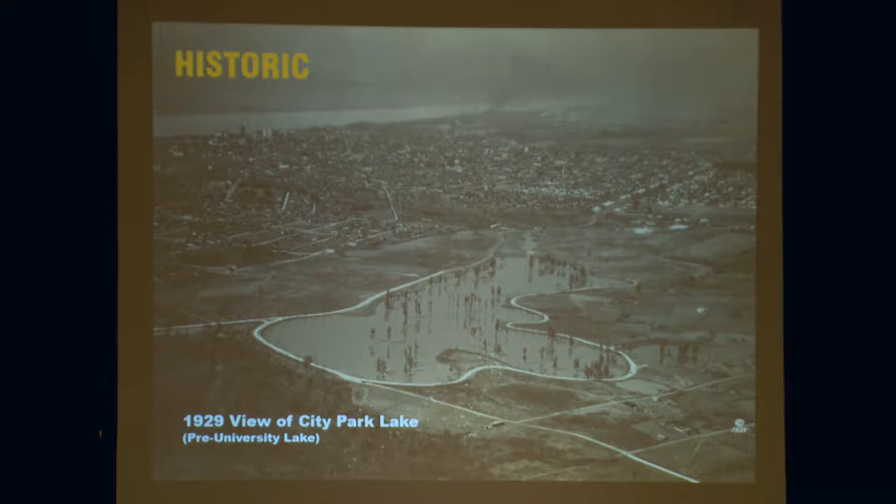Well, almost immediately afterwards, there were fish kills, there were algae blooms. Invasive species started to take over the lakes. They had to do things. All those beautiful cypress trees started to die. There was erosion from day one.

And the reason why is because these lakes were never really designed, right? Not in a robust way. It was just a dam, a make-work project, and then they kind of moved on, right? And they've been beautiful. They function very well when you consider the limited amount of thought that really went into designing them.

And I think that's the opportunity before us today: to think about design and how we actually design a place that really functions for all the things people want to do there. Running, right? That's a pretty simple thing. It's not hard to design for running around the lake. I just need a road and some paving. But it doesn't really work that well because people are running on a road and there's traffic and there's no crossings for them to get across. So a simple thing like that, a lot of design thinking could go into making it much better. That's really what we're trying to do with this project more than anything.

So there's a sort of tipping point here. If you look at Campus Lake, it's starting to fill in. You can see what used to be, when I was at LSU, a big lake, has already turned into half full of willow trees and other things that are starting to fill in. Behind the Acacia House, that's where I lived for a while - sadly it's gone, they kicked them off campus. But behind it, that area is starting to fill in little by little with reeds and all sorts of things, right?

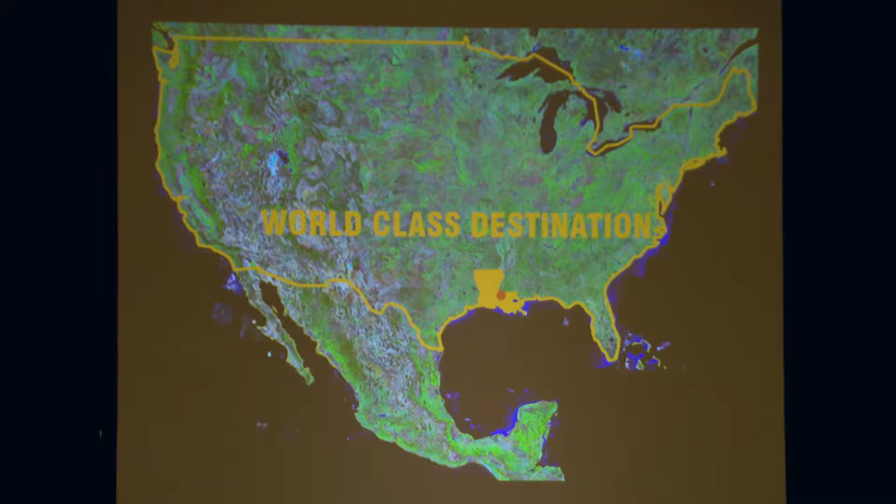People have said, well, world-class, gosh, I don't think I want that. Well, this is Baton Rouge, Louisiana. Why would you not want that? We're a capital, a great capital in the United States, and it's a place that people do travel to from around the world. We don't want to be overrun like Disney World, but when people do come here, they should go away saying, wow, that's a world-class place. I didn't realize it. I should go back sometime.

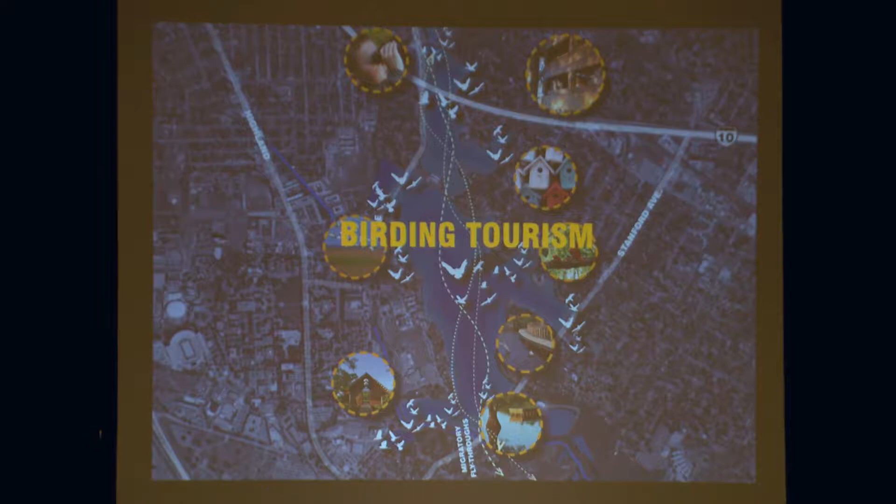Birding tourism is something that's clearly happening here. This is a kind of tourism that's very low impact. It's not throngs of people coming, and it's very seasonal. People come and look at birds, study them at certain times of the year. They stay in hotels, they eat in restaurants. All sorts of things spin off of having a place that people come and view birds.

Improving water quality is another big one, and lots of things happen when you improve the water quality. You can take your kid fishing and he might actually catch a fish every time he goes. That would be pretty cool. But other things too - university students, high school students can participate in going out and measuring the water to understand what's in it, what used to be in it, what's in it now, all these sort of things. And you can start to think about different ecologies that might take advantage of this improved water quality.

And then communities take advantage of it too. We want people who live here to go out and walk around the lakes and not always be thinking, oh, that water's so disgusting. We want them to walk around and think, this place is wonderful. I want to get on a canoe, I want to get on a paddleboard, and I'm not concerned about it anymore. I want to catch a fish and eat the fish that comes out of the lake. So all those things are great, but it's not just recreation of running and biking. If it's a place where you can come and just meet your neighbors, that's a pretty cool thing too. That creates a much more healthy community. People feel safe and secure when you do that.

So it's not all sunshine and roses - you can't just kind of go out. We don't want to do what has been done before. There are key challenges that we have to get into and try to understand how we're going to approach them.

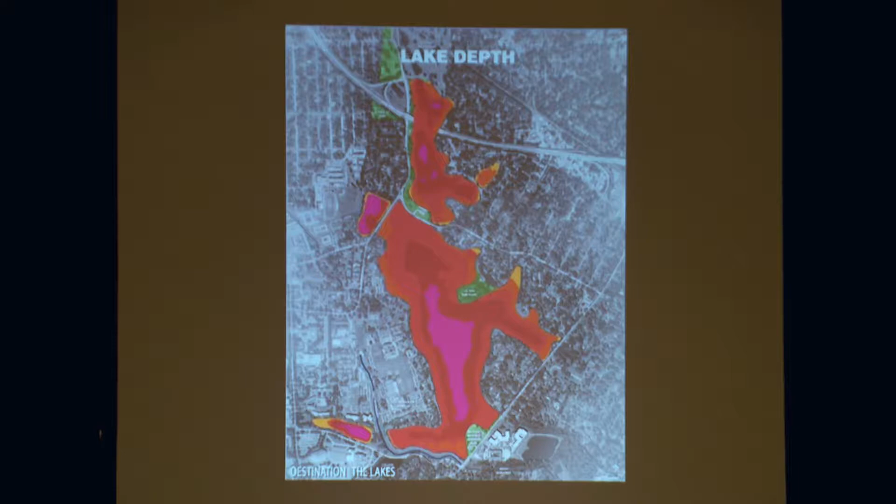The other big challenge we have is the depth of the water in the lakes. This is the number one issue that's now starting to create a tipping point within the lakes. They're very shallow, and shallow water gets hot. In South Louisiana, hot water creates algae blooms and all sorts of things start to happen. So a very simple thing we can do is just deepen the water. That's a huge step in the right direction because it takes care of a lot of different problems.

Now, underneath that water there's a lot of stumps. Is that an opportunity or a problem? Maybe a little bit of both. I like the idea that we can do things with the stumps - we can make kids' play areas out of them, or use them to create certain types of habitat. If you look out into the lakes now, wherever there's a log or something, turtles are on it. There's not enough of that. There could be a lot more of that kind of habitat within the lake. So if we think about using some of these structures to do that, that would be very beneficial.

It's owned by BREC, which is a city institution, of course. But it goes beyond that, just who owns it. It's implied ownership that is really, I think, the secret to this project.

There are areas that seem like they are very private, and that's against these residential areas. If we try to do things in those areas that don't respect that, it's going to be a failure, and nobody wants to go down that road.

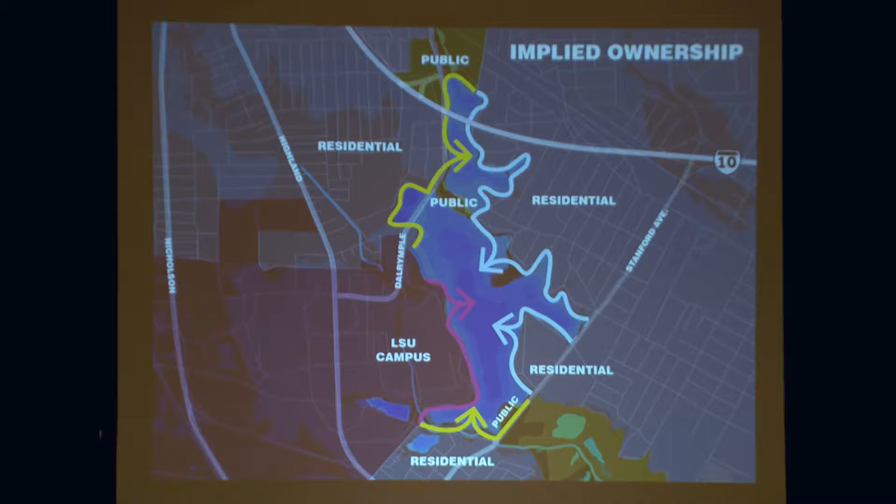Before we get into looking at the plan and all the components in it, we're going to look at the systems behind the plan. These are things that work across the whole plan, and you have to deal with them in a systematic way. If you just try to do them piecemeal, piece by piece, it doesn't really add up to a robust project.

It's generally homes and businesses and things—we're not talking about dirty industries within this watershed. So you're talking about things that just happen in your front yard. That's the kind of stuff that comes into the water. If you fertilize your lawn, that comes into the lakes. If you pour grease down a catch basin, that comes into the lakes. Those are the things we need to think about, and that's what we start to program out and understand where they enter, because that tells us what we have to do to clean the water.

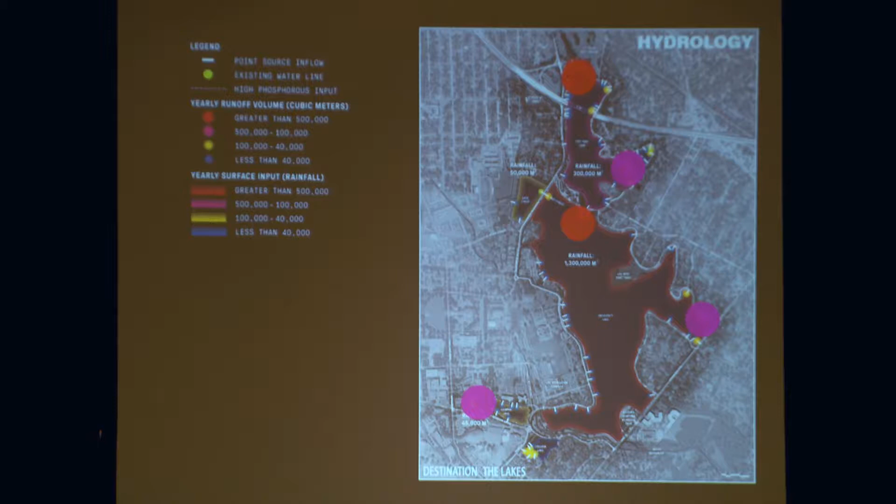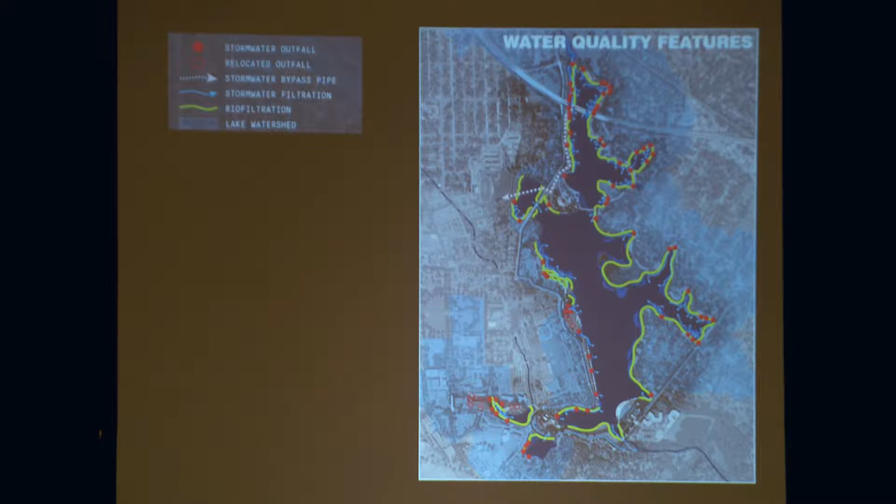That's really our number one job—take nutrients out so that algae and things like that don't continue to bloom. But there are other things where we're looking at other ways of dealing with some of the larger outfalls, and other places where we're looking at just how the water circulates and moves through the system. Right now there's a dam between the two lakes. We're looking at removing that, and we'll talk about that in more detail—that changes the hydrology also.

So these are the three things we're primarily dealing with when it comes to cleaning water. The first one, floatables, that's probably what everybody looks at, that's disgusting, right? I see all this dirty garbage and stuff. That's actually the easiest thing to fix. They float, you can scoop them out. When wind pushes them in one direction, if you have traps there to collect it, you can get rid of it. You need to think about upstream issues, but generally that's the easiest thing.

The second one are sediments. Wherever you had a catch basin or an inlet into the lake, if you could just build a little basin there and let the water sit and hang out for a little while, most of the sediment falls out. Every now and then you come out and scoop out the sediment. It takes time, it's a little more complicated, but not a huge thing.

The nutrients, that's the one that's the real problem. That's generally fertilizer, phosphorus, nitrogen, stuff like that, that just feeds this beast inside the lake, which is algae, and that sucks up all the oxygen. So those are the major things we're trying to work with.

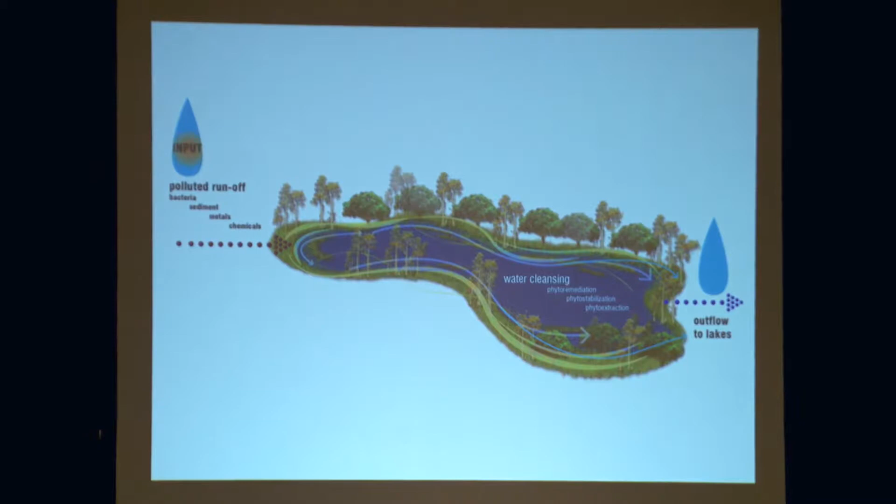So this is a technique we'll be using where water comes into the lakes. We want to build a basin. In a lot of cases that basin may exist already, we're just kind of reshaping it. Then that basin is lined with wetland plants, so contact with wetlands and soils absorbs all those nutrients. Then when the water makes it into the proper areas of the lake, a lot of that stuff is gone, and that problem is reduced.

If we do this correctly, those basins can actually collect some of the floatables that may come in, and they can also collect some of the sediments. But the main thing is really trying to address the nutrients.

The other thing we're looking at is along the edges of the lakes, where water comes off of, say, a lawn or something. If I have a bioswale that can capture that water and let it run along there, it eventually finds its way back into the lake. Again, it's had a lot of contact there, so it's reduced the nutrient loads on that water, and that's very beneficial to the lake.

And those things can be very beautiful, right? These need to look like wetlands, they need to be attractive to wildlife, they create habitat, biodiversity, all the sort of things we're talking about in trying to create this world-class place in the city. All these things add up to doing that.

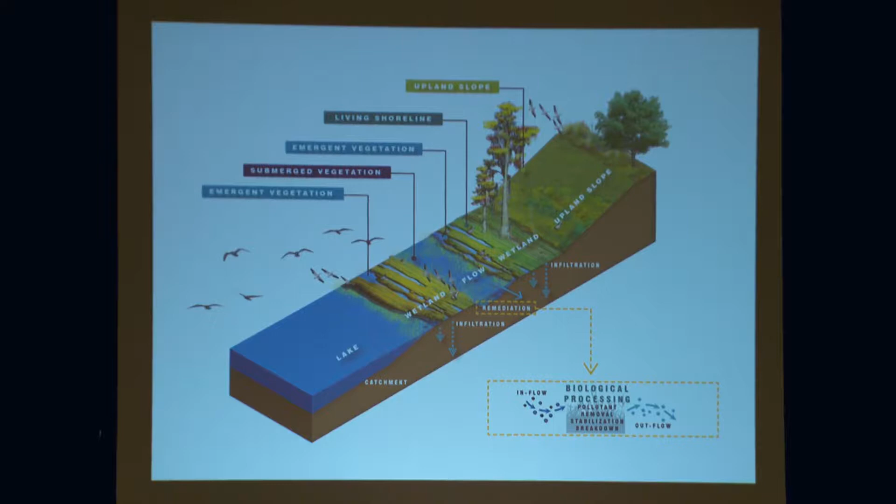Okay, so there's some engineering stuff we're going to do as well. Some of these things sound complicated, but it's just kind of dumb pipes and gravity that make it work. Our goal is to make sure that when we install these things, they look beautiful, not just left to the engineers. The engineers will make it work great, but our goal here is also to make it look beautiful.

What's happening right now is Bayou Duplantier, not Black Bayou, comes into City Park Lake at the north, and exits way down south at the bottom of University Lake, going back into Bayou Duplantier. Historically that water just came through, sat in this swamp, did all kinds of things, and found its way through. Well, what happens now is that upstream, all these fertilizers and sediment that come into the system find their way right into City Park Lake.

So when it rains, the first flush of rain, that first one inch—if you get a four-inch rain, that first one inch is where all the junk is. That's the stuff you really just want to keep out of the lake system. So the idea is to capture it here and route it through to Corporation Canal, which is really Bayou Duplantier, and it all ends up in the same place it would anyway, but it takes it out of City Park by rerouting it around it.

That way City Park Lake becomes much better. The ecological systems south of University Lake are already set up naturally to accommodate those nutrients, so they're naturally released into the environment or used by the plants down there. From there, it goes through a little bit of a treatment wetland in the green box.

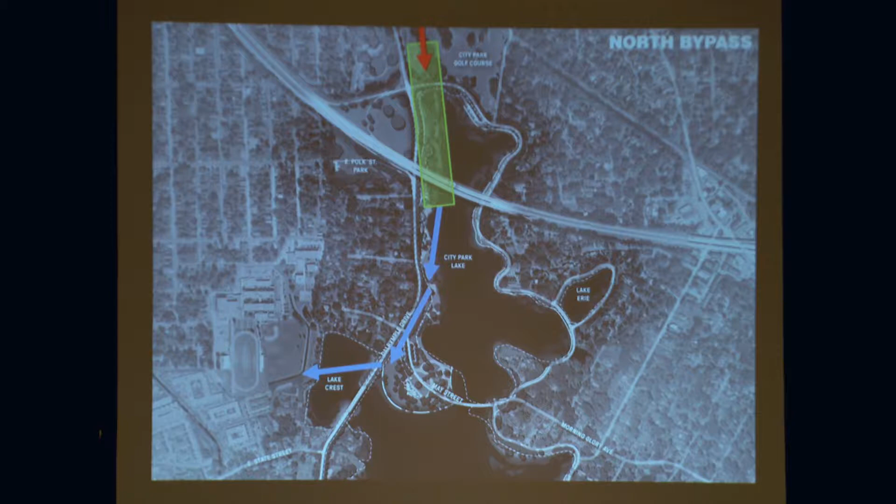So that's a huge win just from this one environmental engineering piece. These are the percentages we're dealing with for the things we're trying to do to clean the water and the effect you get. By doing that bypass, we're getting about a 25% increase in water quality. Deepening the lake, making it cooler and other things happen, about a 20% increase. The riparian edges and wetlands we're creating put a lot of shade on the water but also cleanse it—that's about 15%.

Beyond the scope of this project, these things start to become policy components. It's looking at the watershed upstream and saying, if you have a lawn up there, can we educate people to fertilize less often? Can we convince people to convert some of their lawns to a meadow, keeping only the important lawns they really use? It's also about when the city builds a new road or upgrades a storm sewer system, having them put in bioswales and rain gardens to clean that water way upstream, long before it ever gets to the lake. These things add up to a huge increase in water quality here.

This is just a reminder of the systems we're dealing with. If you're up on Government Street with a business and you pour oil down the drain, you probably never think about the fact that it ends up in this lake system. If we could go upstream and put little markers on manhole covers saying 'remember where this water goes,' that changes how people think. That's a very simple and inexpensive thing to do.

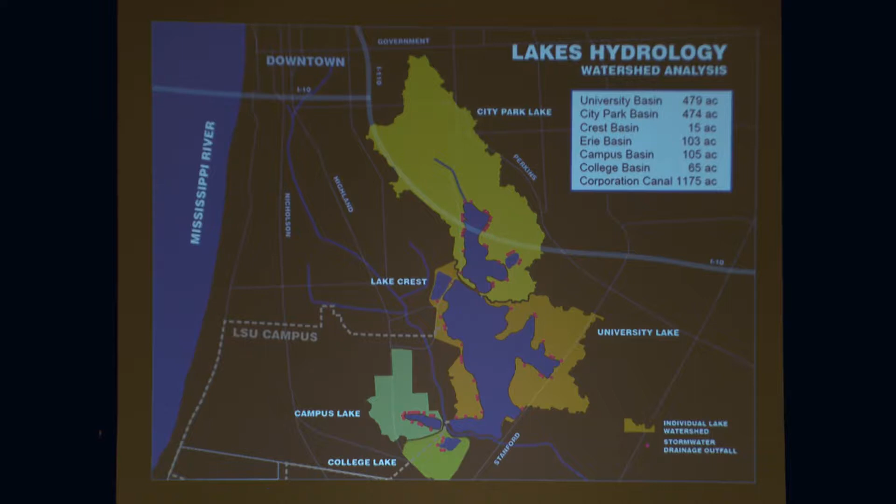So it's basically best management practices—these things aren't new, nothing unique we have to invent here. This is happening in communities across the country that are interested in cleaning this up. Converting lawns, or even just rethinking fertilizer use, is a huge deal. There's drainage technology with cartridges that clean the water to some degree, though they take a lot of maintenance. Biofiltration, wherever we can do it—wherever there's automobiles, surface runoff, and pavement, let's think about biofiltration to slow down and clean that water.

Education, though, is really the end game. If we can educate people so they know where the water's going, they will change their practices. We see it time and time again across the country.

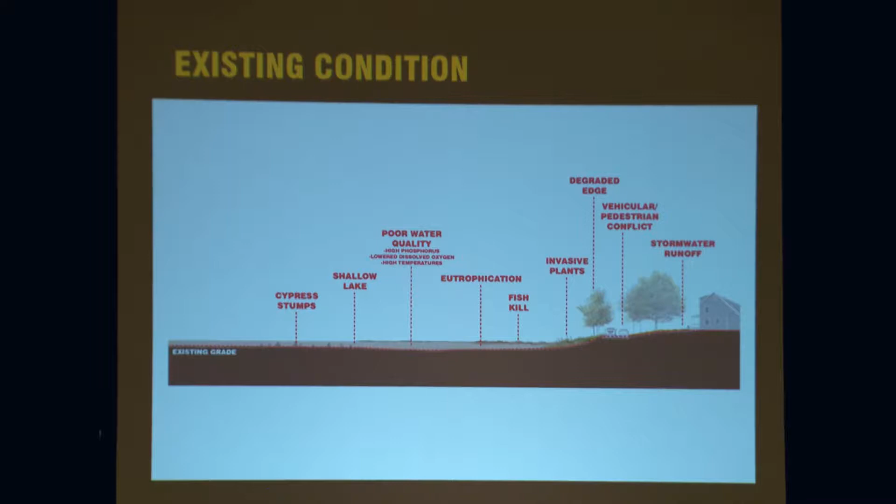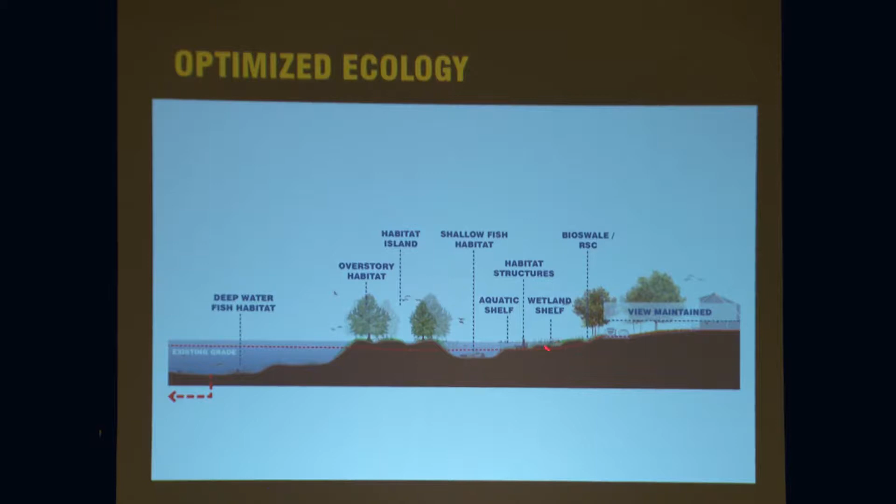If we go all the way, the goal is to take that and make it into something like this. We're not doing this everywhere, but the key components are that there are wetland shelves, there may be islands in a few places, there's shade on the water, there's deep water, there's shallow water, views are maintained for residents, and then we try to do what we can to minimize conflicts with pedestrians.

Winds, we have to go in and study where the wind comes from. Erosion is a huge problem right now in the lakes. There's plenty of places where the lake bank was maybe 20 feet further out historically than it is now. What happens is that little microwaves build up as the wind pushes across, and that starts to create erosion like this. If you really go out with a critical eye and start looking at the edges of the lakes, they are highly eroded. That is happening everywhere.

At first it's kind of a low bank like this, and there's a little bit of erosion. But as the bank gets steeper and steeper because of erosion, it actually intensifies, gets stronger and stronger. If you look right out front, in front of the building here, you can see where the sidewalk is getting close to wanting to fall into the lake. These are little things that add up to big things over time.

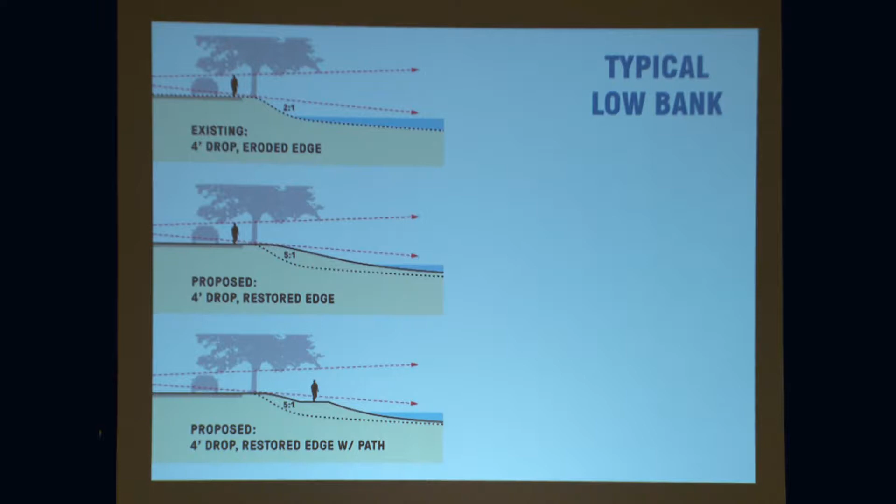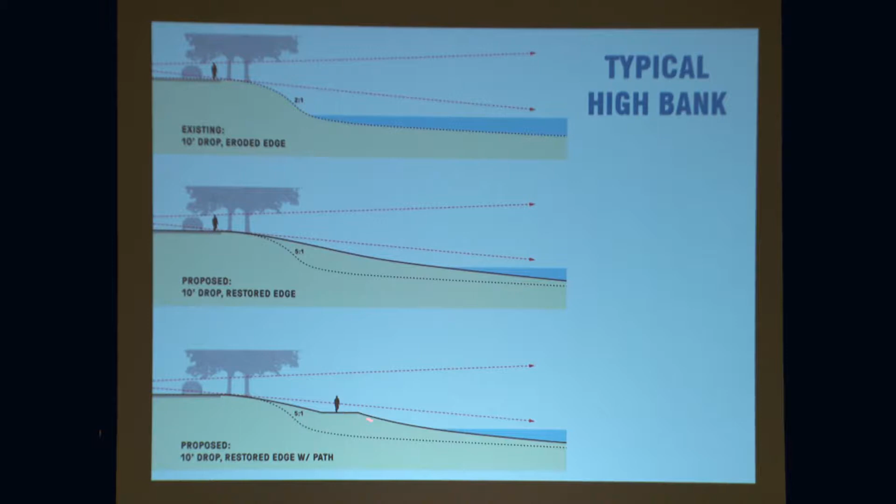The other thing we're looking at is there's different types of banks. There's banks that are high, and there's banks that are low, but also how much fill we can accommodate in different areas. So if the bank is low and I'm trying to push out at a 5-to-1 slope, I can only go so far. If the bank is very high, I can go a bit further. So you start to get this sort of thing. But the goal is always trying to maintain views where appropriate, so that if you push out the bank, you still see open water. You don't actually see the edge there.

So ecology is the next big thing we're looking at. We have an ecologist on our team. They go out and look at things from the ecological microscope. They're not interested in people. They think everybody should change their lawn to a meadow, and there should be hawks living in our rafters, or skunks would probably be fine. We have to take all this stuff and try to decide which items are the most appropriate to use and which ones are just wishful thinking, but great ideas.

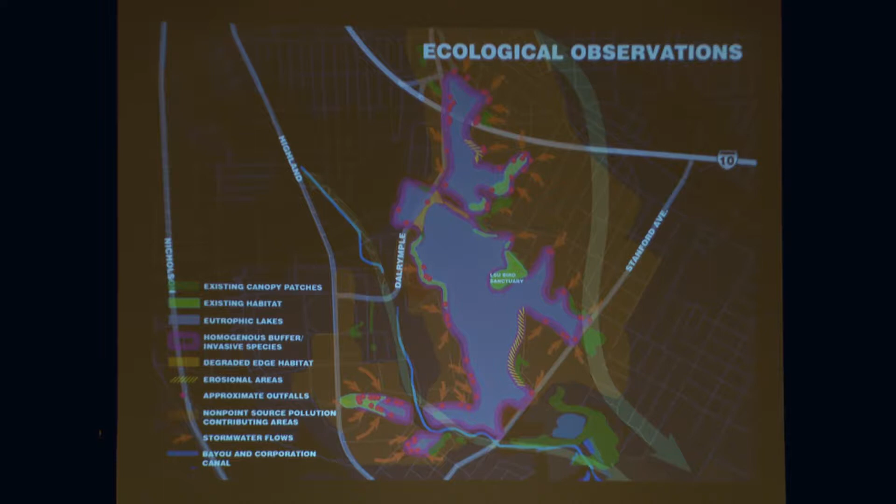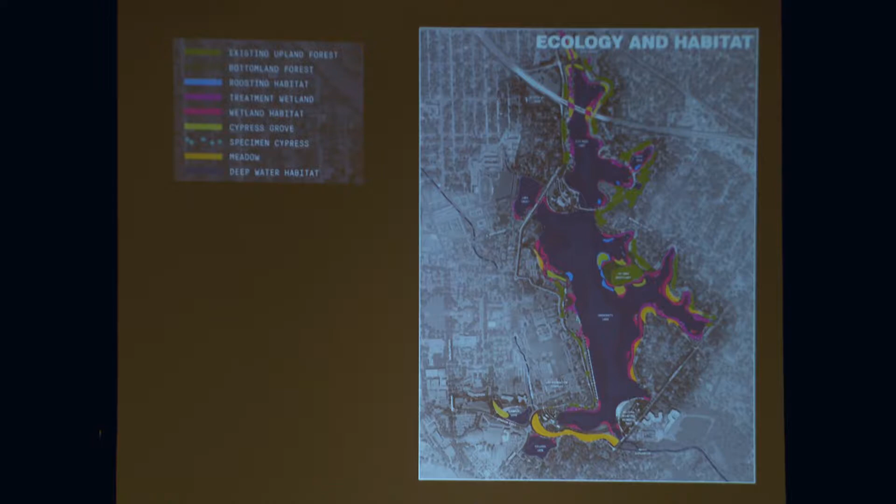So that's where we are now. The next step is you take all this information and then start to create these diagrams about what kind of ecological functions and habitats we're going to create in which locations around the lakes. There's a lot of colors here that represent a lot of different types of ecosystems. The main thing is that we just want it to be more robust. We want more variety, more edges between different types of ecologies. That's what animals like, that's what insects like that the animals eat, and the birds are attracted to. That's the goal with ecology.

And it's turning up the volume on each one of these types of places. Okay, circulation, that's a huge one. These are the big conflicts. This is the danger that's happening around the lakes. There's a lot of places you just don't want to run, but people are out there running because it's the only kind of opportunity and because the setting is so nice.

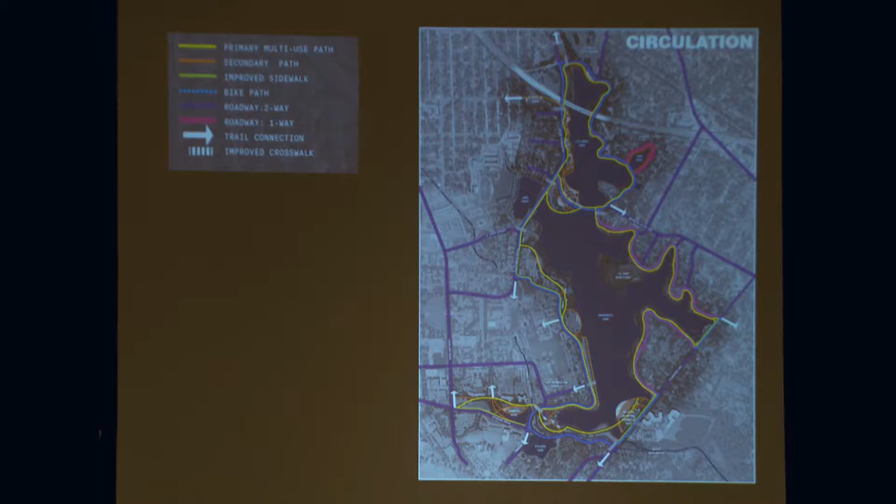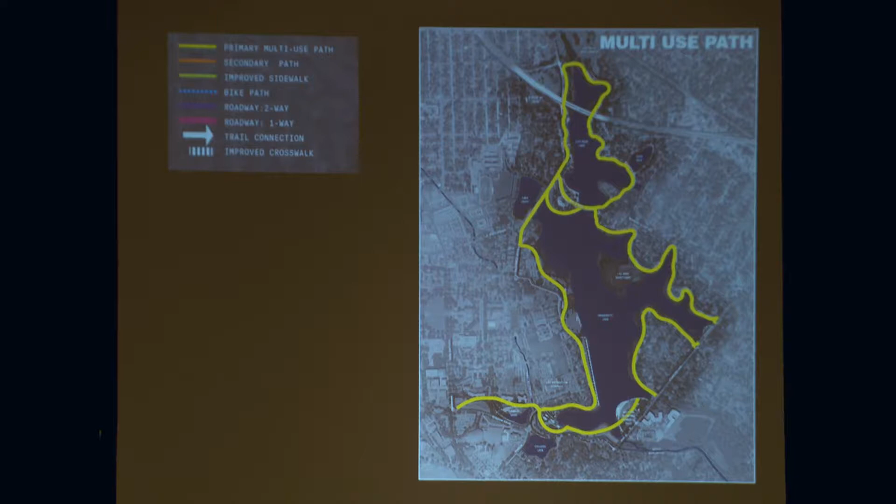So what we've done here is we've gone in and looked at what kind of additional circulation we need to upgrade so that all these things work much better. There's a lot of very fine-grained detail. I think the main elements are that we're planning on a multi-use path for recreational bicycling, people with strollers, people walking, and people running on a recreation trail that goes all the way around the lakes, so that it's as unimpeded by conflict as possible. There are a few places we're still trying to work out some of the details, but in general, we're very close to getting there.

You add to that then sort of finer grained paths. These are just little pathways within parks and open spaces where you can sort of hang out, wander around. You're not as in the way if you just want to sit and hang out as maybe if there's bicycles moving by.

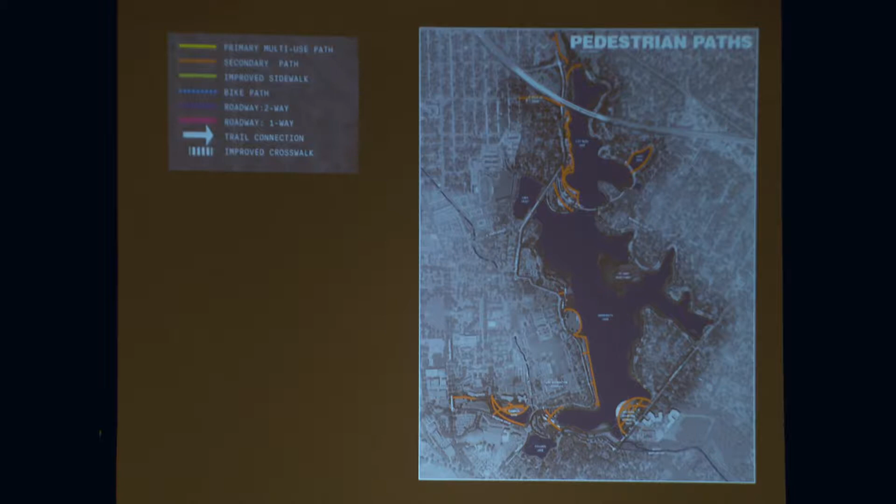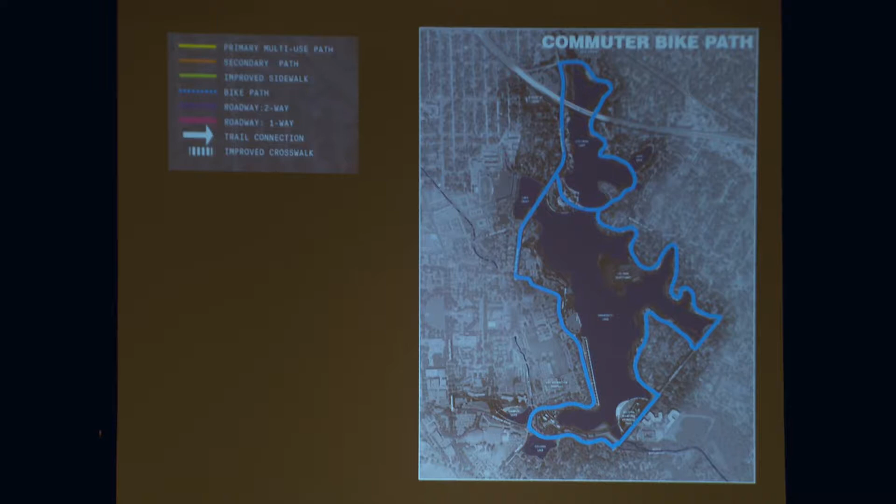There's also places for people that want to commute or go faster on bicycles. We don't want to mix those people with pedestrians, so we want to make sure that there's a special place for them within the fabric of the project.

And then cars, they're not going to go away, but the big goals here are looking at, in pink, the idea of making one-way streets where appropriate. That's going to reduce conflicts, cut down the amount of traffic that drives through residential neighborhoods that really don't want a bunch of traffic going through them. It will then reduce conflicts between people that are walking, riding bikes, and all these sort of things that are happening. And then the yellow, those are areas where we're looking at enhanced pedestrian crossings.

It may be just changing the way an intersection works so that it's easy to get people and cars through those intersections. A lot of them were built in the 1950s, and if you notice, you always get a free right turn, you never have to stop. That was at some past time when everyone thought we would never walk again, right? We'd all just drive around in cars. That never really happened. We continued to walk. So those kind of interchanges need to be rethought so that there actually is a time when pedestrians have the right of way and they can get through without any conflict.

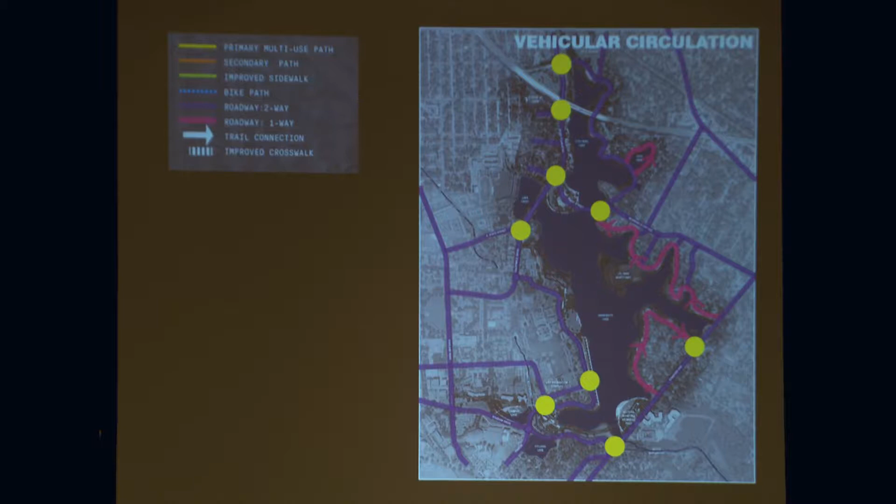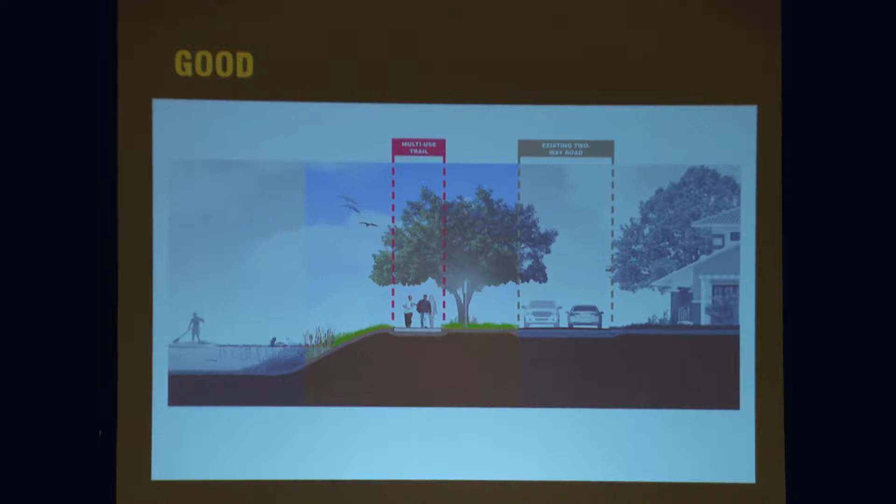So kind of good, better, best, that we sort of look at these problems from that approach. Good, let's just get a multi-use trail off to the side. Better would be if we could separate bicycles off of it, and maybe we put them on the road. And I think the best is if you make that road one way. It's much more predictable, it just reduces all kinds of conflicts.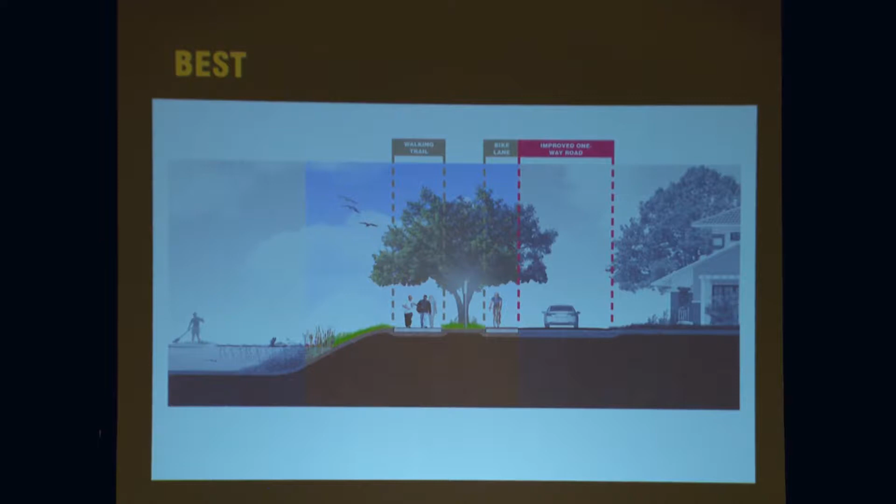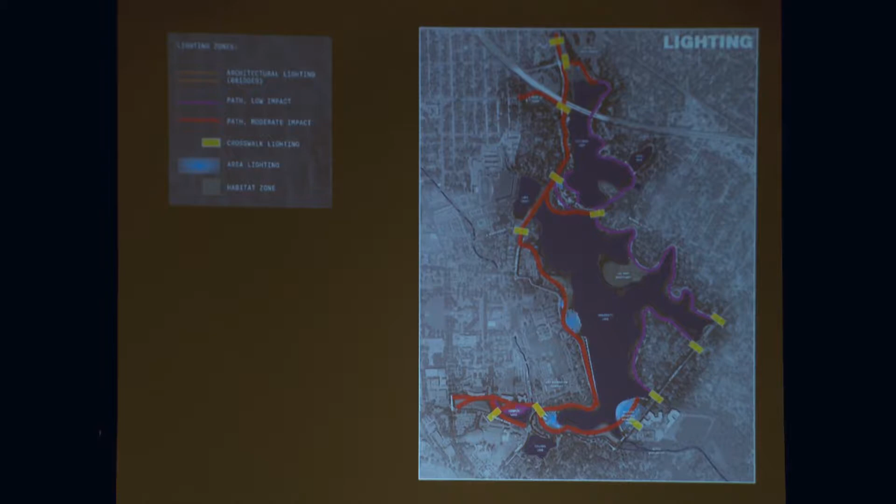Lighting is another one, and we continue to study this. With lighting, what we're trying to do is understand frequency, the amount of light that needs to happen in different areas. This is really about where you want to drive people to use in the evening. So if there's a place that should be used in the evening, you want to light it in an appropriate way. If it's a place that you don't really want people to use in the evening, then you have a question before you: do I just not light it so they don't go there? Or am I setting up an unsafe situation where they're going to use it anyway, and then now it's not lit, and that creates a problem?

So these are some of the fine points that we're working through in the plan right now. But generally, we think we want things to be lit in an appropriate way. We're talking about low levels of lighting wherever possible. If there's boardwalks and things, we don't want lots of glare. If we're trying to make this place very bird-friendly, having lots of lights is a bad idea.

So this is a little sketch that shows what an upgraded maybe East Lakeshore Drive might look like, with lighting and a bicycle route here, pedestrians down there, and a very, very low level of lighting, maybe 1-foot candle through there.

Okay, so this is the main event, right? You guys want to know what the master plan looks like. What is all this stuff? So last time we looked at lots of diagrams that just sort of said what goes where. This time we actually got into an illustrative plan that starts to really illustrate what these areas look like, how big are they, how small are they, how do they connect and interact with one another. The major pieces, I'm going to walk you through the components quickly, and then we'll come back and go through each one in detail in a moment. But basically up top, it's City Park Lake, so the City Park here.

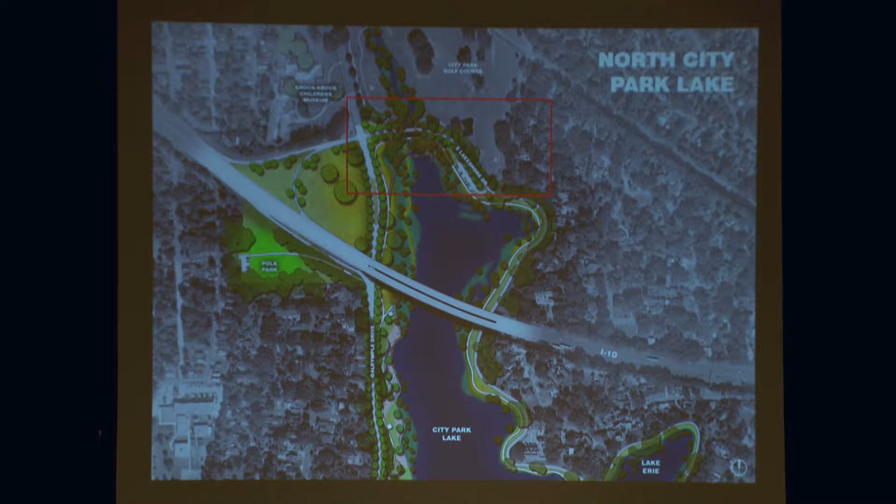It's across a road. So the idea is to upgrade this interchange so that we get a much better pedestrianized crossing there, to create this boathouse experience right here, and that's for renting boats. If you've been to Central Park, there's a great experience - you can get on a rowboat and take your family out or friends. There's some parking required to accommodate that. We're studying exactly how much parking we need and where exactly it goes, but it's going to be within this vicinity, and those start to be the pieces that create this zone.

So what are we proposing? The idea is that - and we have not designed buildings and facilities yet, there'll be some details of that, a lot of that happens when we get into the amenities phase - but the idea is that it's a pier that's very simple, right? There's a little bit of architectural shade canopy maybe on the edge, you can wait for your boat or just sort of hang out there. If we need a place, a kiosk where you can get your tickets and pay your money to do the thing, it's something that's very simple, beautiful, artful. It's not trying to call attention to itself in some big way.

But anyway, it's just this really cool, simple little experience that draws people to the lakes. And you know what, if people go out and use them, they'll want to take care of them. And if there's ever like a bond measure on whether we should fund a new cleanup of the lakes or add this component, people will vote yes, because they love these things so much and they get to use them in new and unexpected ways.

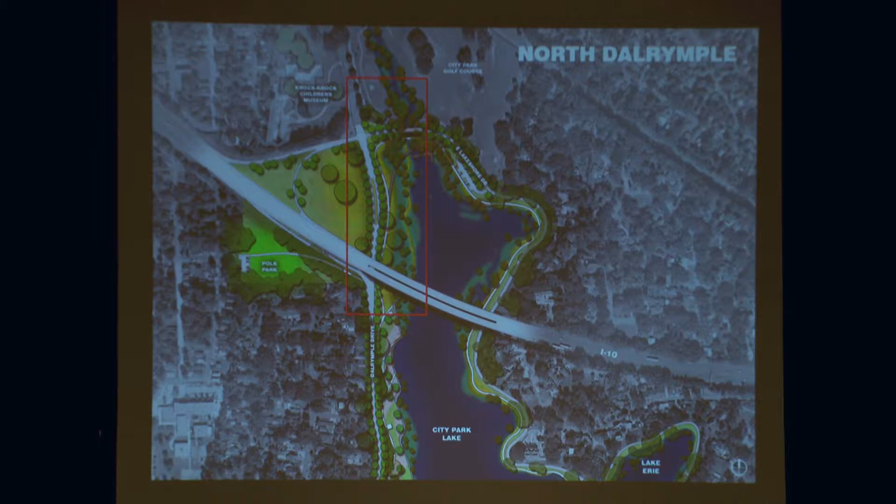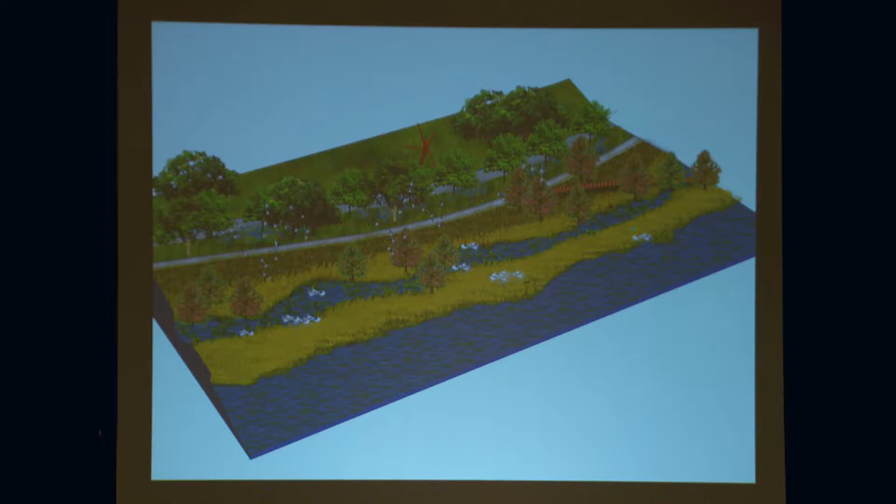So here it is—this is Dalrymple back here, and this would be the slope up to the I-10 interchange. This is a big wetland system, taking all that water, flowing through there. It's beautiful. It's doing work. It's not just a landscape that's pretty—it's got a job to do.

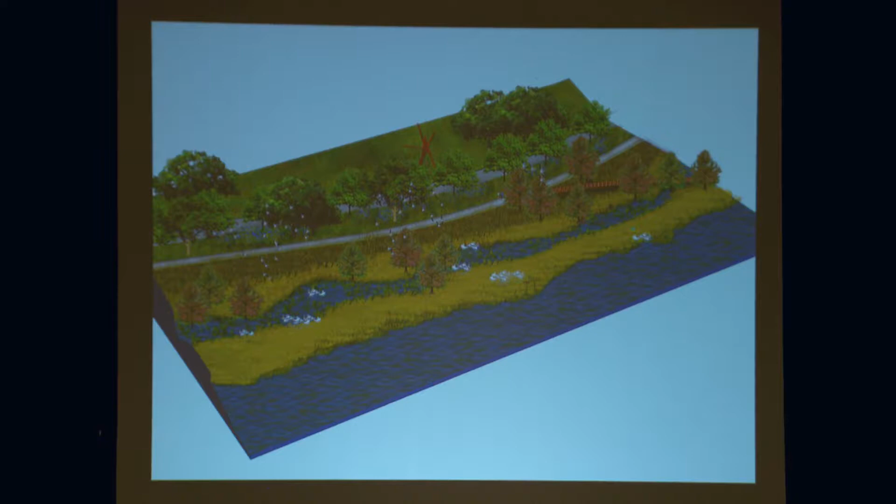There's some boardwalks, this multi-use trail, and whoever drew this in my office clearly knew there'd be lots of birds there too. So it's a beautiful place, and it does a job.

It might start to look like this if you're within it—you see the lake out here. We've introduced maybe some cypress trees to kind of screen the interstate highway. There's the idea of a sort of glass-type sound wall system up there, so views are maintained. We're doing research on that to make sure it's appropriate for birds—we don't want to do something that's going to be a problem.

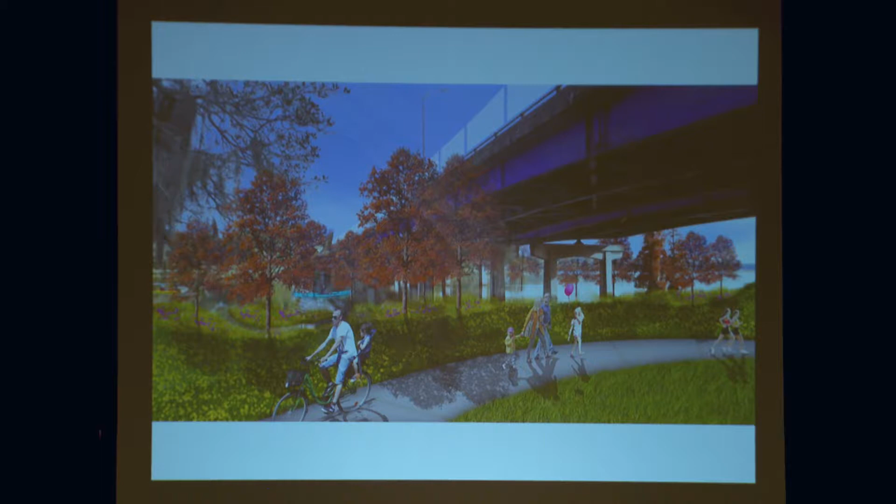We're trying to look at ideas of what to do with the bridge. It's a steel bridge—that's part of why it's loud. There are certain things we could do with baffles and insulation that we're looking at to change the acoustic dynamics of that space.

The idea is that yes, we're going to have boardwalks and wetlands and kids doing stuff they can't do right now, but it's not all that. There needs to be places that are like a garden, places that are very respectful of the cultural history—these great big oak trees that are really part of the identity of this area of the campus. Those things are very much a part of these design ideas.

This might be a view of it, a different one—these people are on a multi-use trail. It'd probably be a little wider; this trail would actually be about 12 feet wide. But you start to get the basic idea of the wetlands and people and the roads back there, and how all these things work.

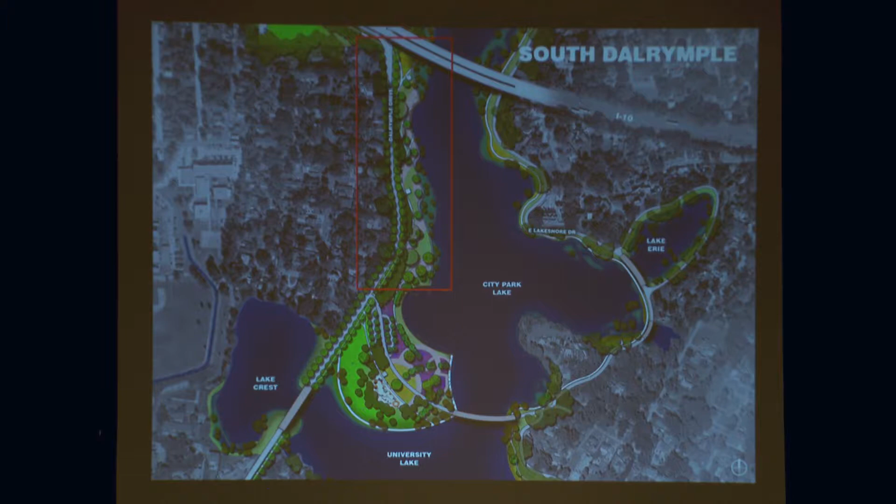So as you come further south now, we're crossing underneath I-10 and down to this zone. This is envisioned as a very soft, curvaceous kind of promenade that moves through there. There's a lot of nature, but it's gardens as well.

So if you look at what's existing, here's the I-10, this is the exit off of it. Again, a very bad pedestrian space. We are looking at opportunities for getting from Polk Park, which is hidden back behind here, down onto this zone and then across, and looking at how a pedestrian crossing connection can work there.

These trees need to be maintained, of course. There's erosion and things happening that we'll start to look at how to clean up. And then we're looking at places where pedestrians are too close to the roads and how to move those around. This is a rendering that starts to show some of those components and how that might work.

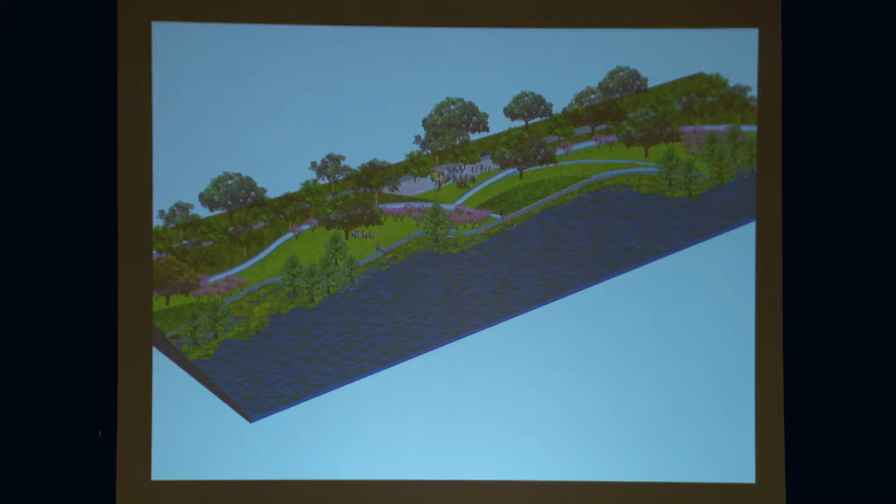So in this one, it's less focused on nature. There's plenty of nature there, but variety is the spice of life here. So we want areas that are just beautiful lawns that people can hang out in. There can be trees that are crepe myrtles. Everything doesn't have to be nature or native, but then there'll be lots of groves of cypress trees, big live oaks, a multi-use path that moves through here, and maybe a very slow moving path right along the water's edge. Places where you could get right to the water with no wetland stuff, where you can fish. Kids can throw stuff in the water. They love skipping stones and doing things like that. So we want places you can do that.

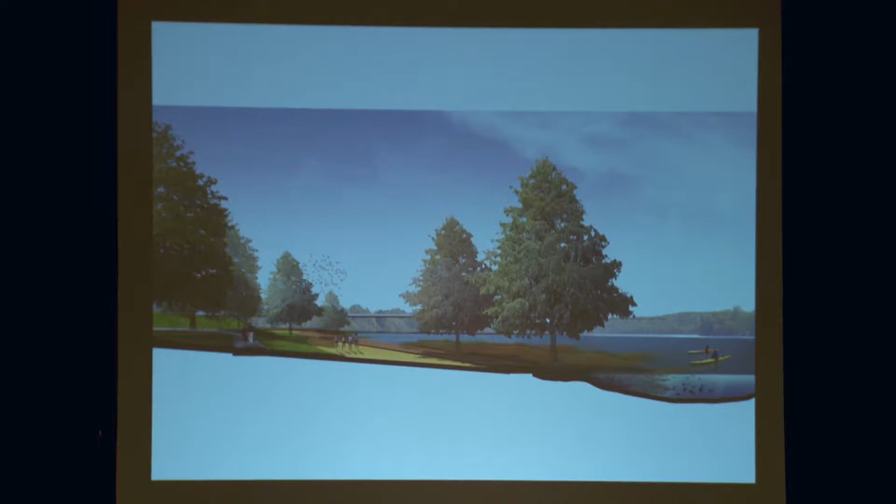So this might be a rendering of what that looks like. You see I-10 in the background, and you see layers of trails and activity areas. Very comfortable, very beautiful. And these are the kind of places that we envision. There's gardens, there can be beautiful trees with displays of flowers, but there needs to be areas that are natural as well. Some areas where the water comes right up to the edge and people can just hang out on the grass and enjoy the day.

And maybe little small areas where certain events can happen during the day. We're going to talk about crew races. There, once fishing is much better here, you can even have fishing tournaments, maybe one day a year. That would be a fun event for the city.

Okay, so as you get to the end of that idea, it basically ends in a new end to City Park. City Park is now coming all the way down to this little park here. And this idea is that this is much more of a family-focused park. You can easily walk from one end to the other. These little purple things are gardens and whatnot. There's parking, absolutely, and we're still studying how much parking we need, but it's not going to be intrusive. And then there's places that are big lawns and places for kids to hang out and do stuff.

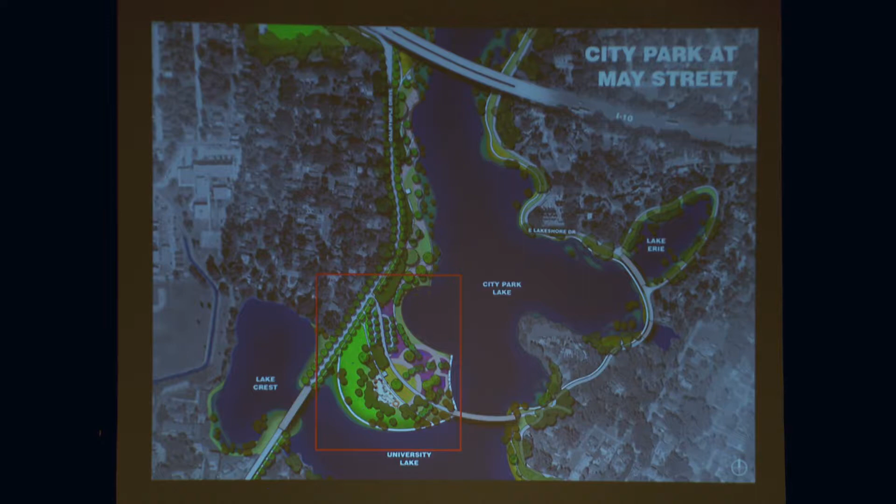So this is some of the things that are there now. There's a bit of a little pier there, and this is the parking lot that exists in that park right now. That park was built the last time the lakes were dredged in the 80s. There was nothing there originally. That thing was added onto, but it was never fully programmed. So the idea now is let's figure out what to do with it, let's design for this thing. And then places where there's trails and walkways, garbage cans, all these sort of things need to be programmed into the project.

So here it's about families, right? And the idea is that, look, we want play equipment and things, but it doesn't need to be traditional swings and big colorful pipes and stuff like that. It can be a different kind of thing. We're going to pull stumps and logs out of this lake like crazy. Let's make really cool play stuff that kids can get inventive with and come up with their own idea of what to do with these little spaces that we make.

We can make bird nests for them, right? They love sitting and things like that. There could be a place like at the Luxembourg Gardens in Paris, where you can have a guy with a couple little boats on a stand, and you can rent a boat for 50 cents or a quarter, and push it around in the lake in this sort of little shallow basin that we've created. I don't know if we're going to encourage kids to get in the lake, but you can certainly do it from the edges, and I think it'd be a lot of fun. And then just different ways that they can hang out, and families can have picnics and do different kinds of things in a very relaxed way, but not in a highly structured way.

So now the next piece, this is May Street that moves through here. May Street's been realigned, but it still ends in exactly the same place it currently does. So this is the existing May Street that comes through here. The idea was to try to pull it back a little bit, and I'll show you some diagrams in a minute about why this bridge is where it is.

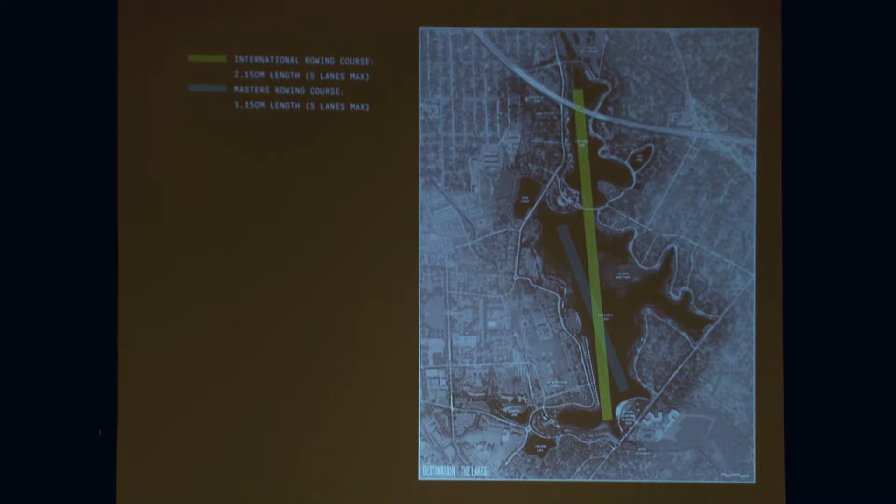Okay, so now if we jump down to this area behind the fraternity houses—here we go. Here's Lod Cook right here, so we're all right in there. There's already a lot of nature that's just volunteering and happening right there. The lakes are getting very shallow very rapidly in this location. So the idea is to build upon this hydrologic and natural system that's already happening—how do we build upon that?

The goal is to create—if you go back to earlier, we talked about birding as an opportunity, right? We want to attract people to come here and see that, and then talk about Baton Rouge as such a great place. So this would be an idea for a new birding center that would happen there. It could have a strong focus on some of the museum elements the university has, exposing those to the public here. Or it could just be a very simple pavilion—a place where you can pick up some binoculars, or there are bird blinds and boardwalks you can go out on to take in the birds and wildlife.

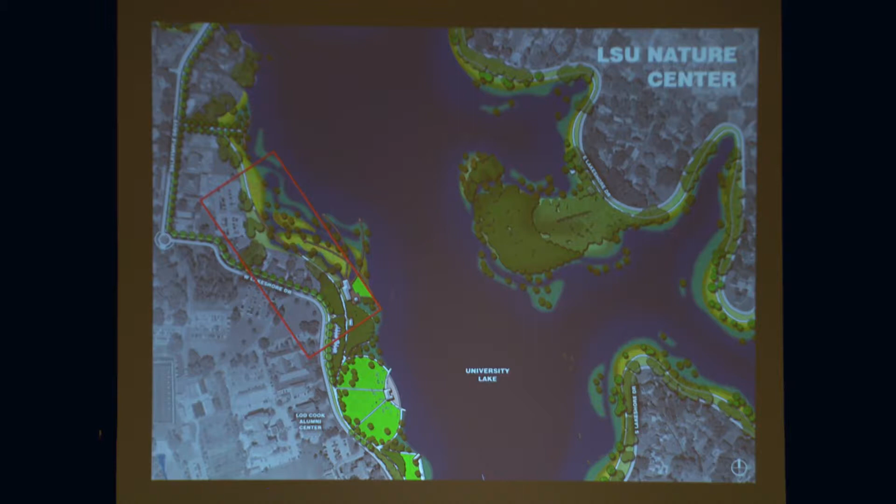So this is what's happening right there. You can see these areas starting to fill in little by little over time. A lot of it is really filled in, and it's gone out maybe 30 feet from the bank from what it used to be.

So it might look like this: wetland areas, places with shade trees, lots of big boardwalks moving out there, and blinds and things happening out on the edges.

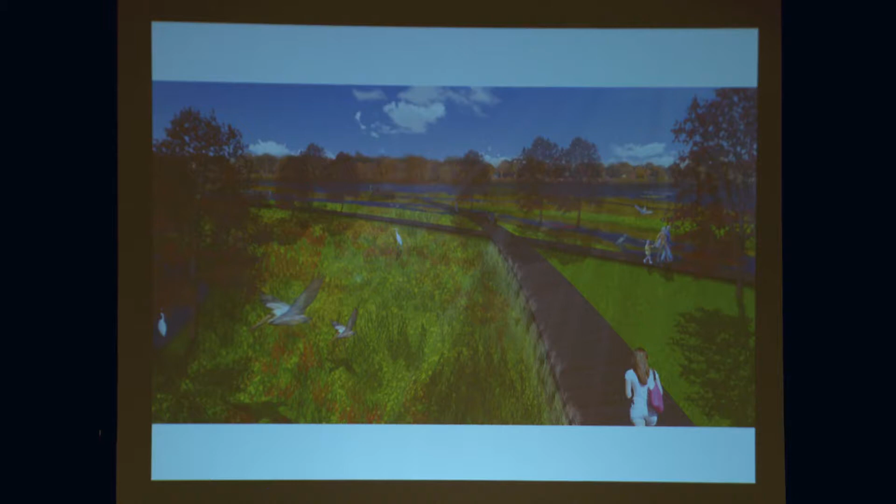And it's all about this kind of stuff—places to hang out and do these kinds of things.

In front of Lod Cook, if you walk out front, there's a little pavilion or overlook. The idea is to expand on that, since this is already kind of a public center on campus—the lab school is back here, fraternities up here, sororities just below. The idea is that there could be a very flexible event space that can accommodate lots of different uses depending on how the university wants it, becoming the window on the lakes that the university needs.

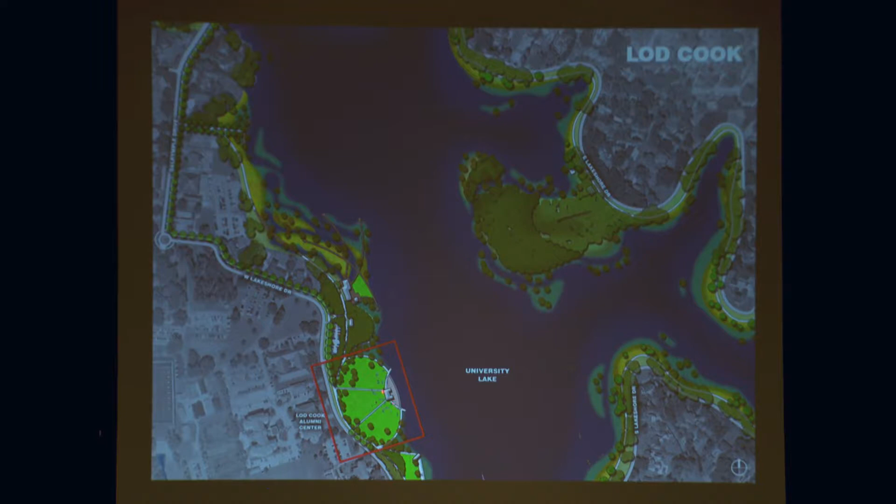So it might be something simple like this: a lawn that slopes down to the lake, maybe a little pavilion at the end, maybe a little walkway. People like to get down to the edges of things—you can throw a Frisbee.

If the university is having an event, it could be set up one way one day and back to something else the next. There could be certain game-day things programmed into it. If the university wants a small concert to show off the work of some students, that'd be a great place to do it. You could fly a kite. If you wanted to rent it for weddings, you could probably fill it four times a day, every weekend throughout the year—I don't know if that's something we want to do, but these are just things that are on the table.

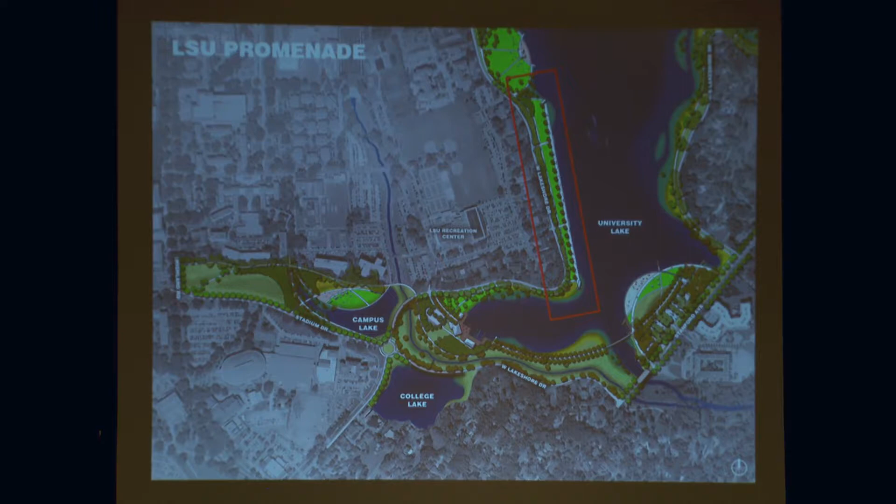And then in front of Sorority Row, remember now there are fraternity houses mixed in there as well. The idea is now even more of a campus life experience there, maybe less formalized than this thing. This is much more informal. You kind of go out and figure out what you want to do with that space, even though a lot of tradition is wrapped up in how it operates. But it's really trying to solve these problems.

So it might be something like this. Here's the existing roadway, and remember the water is right next to the edge of it. If we push it out a bit, we start to create these lawns, and kids can come out and invent whatever they want to do with it. It's a hard edge, so you could put boats in easily if you wanted to, or just come down and hang out on these steps, hopefully study, whatever.

So that might be a section that cuts through it: a lawn sloping down, a promenade, some steps down to the water, big shade trees, and then all the traditional things tied up with fraternities and sororities along the edge here.

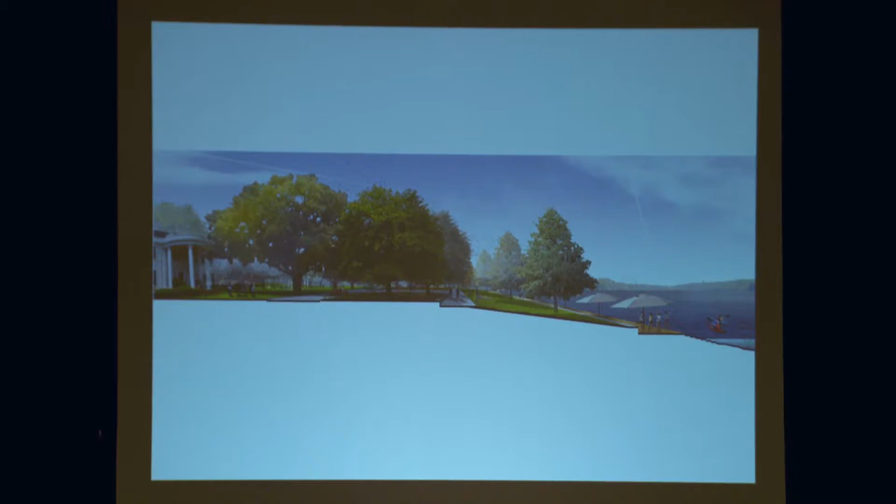And it's this sort of thing — if we have crew races, that's the ultimate place to watch them. It's a long linear space. You can imagine two days out of the year with bleachers set up and people hanging out watching this thing; it'd be a blast. But I think most importantly, it's about this kind of thing — just hanging out, day after day.

Okay, so as we come around the corner, this is the edge, the end of the fraternity houses. There's Campus Lake, College Lake is here, and LSU's Recreation Center is there. So the idea here is to look at opportunities for taking the recreation center and putting it out on the lake, so there are different types of opportunities for students, different things for them to do.

So the idea is a boathouse here. If there's crew, this is where the crew house is — they keep their equipment there, this is where they meet. There's also a facility of some sort that could be a small cafe, or a place where college students pick up paddle boards, a canoe, a kayak, or a sunfish. They have their card, they can check it out. So it's very much an extension of this.

There's lots of questions we still have with the university about how it would operationally work, but there's definitely interest in this new improved way of dealing with recreation. There's some parking that would be accommodated there, but most importantly, it's very well connected to Wampold Park with a simple pathway and a simple little bridge that connects things together nicely. Wampold Park has a lot of university students and young adults using it. We think this connection between the two would be really important.

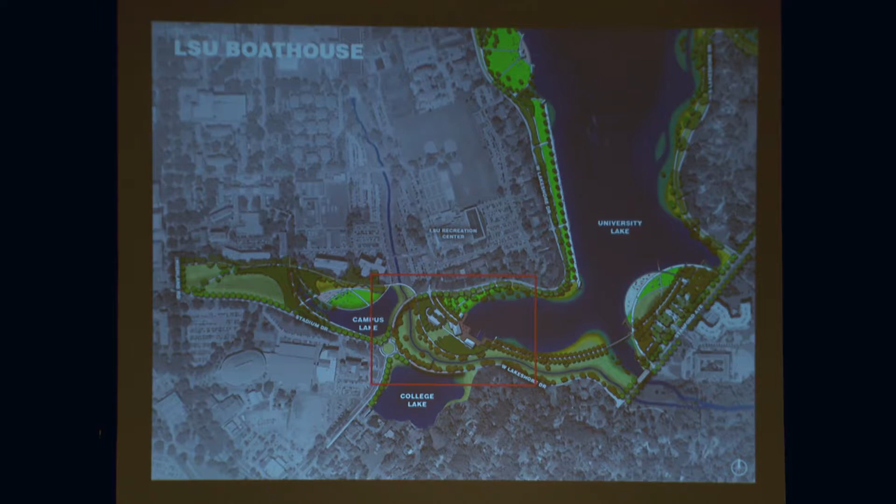It really expands the idea of that park so that it extends into the university. There are upgrades to College Lake happening, to make sure it works hydraulically as well as possible. Campus Lake is one of the most degraded lakes right now, so we've come in and said, look, we're just going to work with that. It's filling up — we're going to take the part that's already filled in, use some of the fill, turn it into recreation space, and say that's it. From here on out, it's protected. We're going to make it a great lake.

A new student hangout space is envisioned here, because all of these old dormitories are expected to be torn down over the next few years, with new buildings constructed in their place. So this becomes a big front yard for all of that student life that happens there.

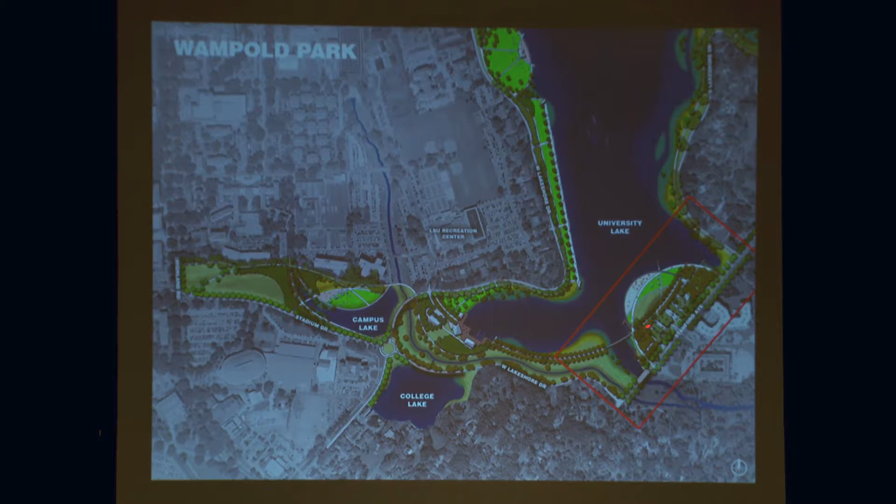Expanded parking as well. So some of the things that are there - the boat dock idea and the boat slips - that remains. These pathways and things, those remain or they get upgraded. There's great lighting there that's happening, and we want to expand upon that system that already exists. And then you can see some of the views - the water, the land is very low slung. A lot of this land was made in the 1980s when the last time the lakes were dredged.

It's a beautiful spot. So this might be a vision of what it looks like in the future. As we expand it out, we start to think about this beach - maybe there's a hard edge, so kids with paddle boards and things, it's very easy to put them in and out. And this is people coming from off-site that are using this. There might be a pier for fishing or whatnot, or just for boating, and a small event lawn.

We're not trying to do something particularly big here, but a thing you can do different types of events on certain Saturdays maybe - certain times of the year there might be a kayak festival or a kite flying festival or whatever it is, but things like that can very easily be accommodated if we design for them. You can have hookups so that if there's an art fair or something, there's water, electricity, and sewer connections built right into the fabric of the park. It's all this kind of stuff that people are already doing there - we just want to make it easier for them to do it.

Okay, so the east side. The main idea of the east side is let's work with how it's operating already, how people are using it. The big function right now is running, walking, strolling. We just want to turn the volume up so that that works really easily and it's not creating a bunch of conflicts that are there currently.

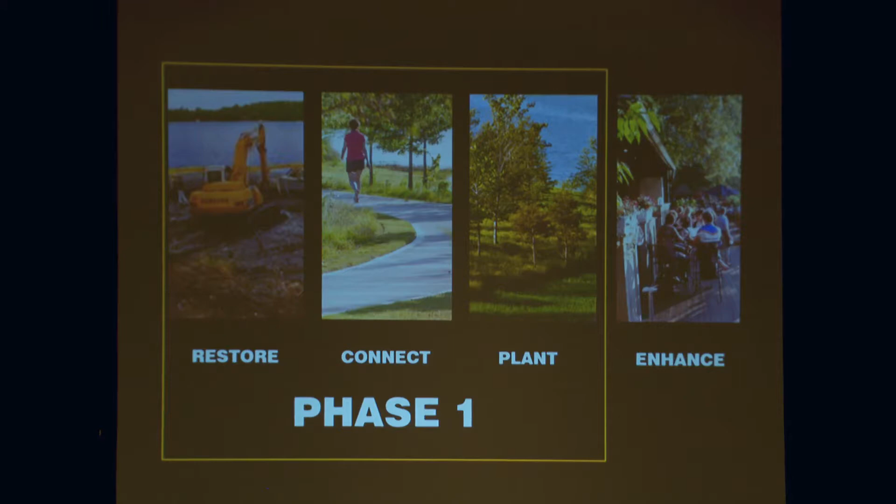As subsequent phases, we have about 30 projects identified in the cost estimate. Subsequent phases will bring in all of the enhancements. So things like the boathouse at City Park Lake—that's an enhancement, that's phase two. We have to make the land and build the pathways now so there's a place to put those things in the future. Some of the improvements at Wampold Park, that's phase two—we'll make the land now, but the big beach and terrace feature would be in phase two.

It's important to remember that when this series of meetings is over and this master plan is done and we're out building all this stuff, your work is not done. You have to keep pushing to make sure phase two happens, phase three happens. We want to line all that stuff up so these things keep going, because nothing makes the next step happen better than a successful first step. We see everything really lining up for a very successful first step.

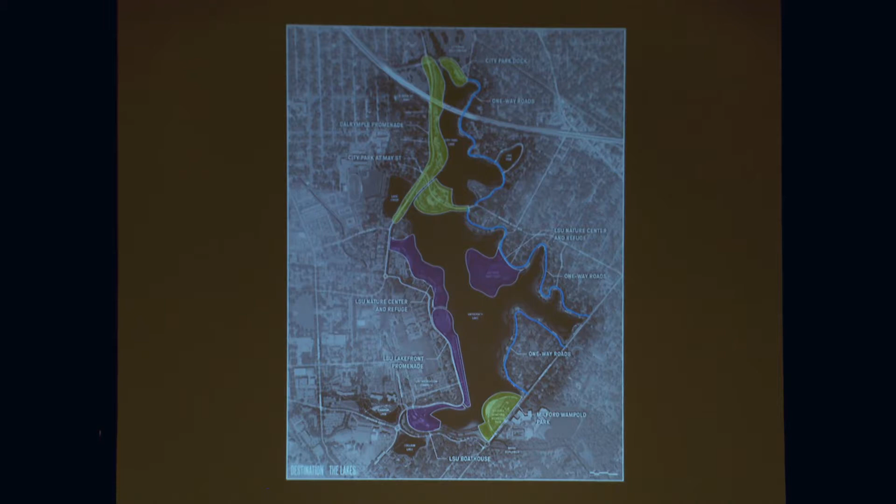Okay, this will kind of walk you through how that works. So this is the green stuff—this is the land and the wetland shelves that we're making. That's part of the first part of phase one. The second part of phase one is the trails, the connectivity. And then phase two projects are all of these sorts of enhancements that will be happening.

Now, Lake Crest—Lake Crest is complicated. What we've done is gone back and looked at... my mother used to teach at Buchanan Elementary School. There she is. But Matt and I went out trying to see if there's a way to get a trail from the neighborhood behind there, this is McKinley, to Lake Crest.

There actually is an opportunity to do it, but it's on school property. There's a big fence on this canal here—very complicated. We haven't tried to encumber the project with that yet, but it's something we've explored. The other issue we're trying to understand better is there's a zone right here used a lot for fishing. As you approach it, there's a sign that says authorized vehicles only, keep away—like it's some nuclear facility or something. There are garbage cans that look like it's BREC stuff, but if you check any maps showing ownership, BREC doesn't own this thing.

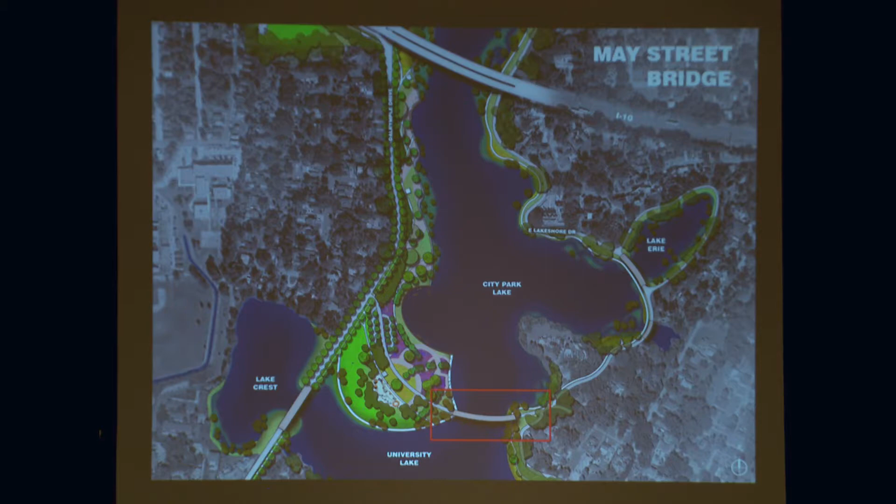So the ownership of this piece is very cumbersome and not clear. The idea is that if we can get a trail, or figure out how that piece works, we want to embrace it because it's a really beautiful little spot that actually gets a lot of use. The other thing happening within Lake Crest is we're hydraulically connecting Lake Crest and University Lake as strongly as we can—not with a bridge, but a culverted crossing—so there's a lot more hydrological interaction within that zone. I just wanted everyone to know that piece is not neglected.

Are you filling in the big ditch along West Lakeshore Drive? Which big ditch is that? Oh, the Corporation Canal, sorry. That's this piece. The answer is no, we are not.

If anything, we want to enhance it at this point. There is talk about filling in this segment here as it goes through LSU—there are certain things they can do with that, and it's already filled in through that section. But at this point, we are not looking at filling that in. It's very expensive to do projects like that, and we like the idea of enhancing some of the nature associated with that zone.

Okay, that was a good question, and it wasn't too hard because the answer was just no. Okay, oh, this is a good one. When lakes are drained, will the turtles and wildlife be relocated, or caught and released? Sorry, I'm a Lakes turtle fan.

That's good, so am I. When I was a kid, we used to go out and count the turtles on the logs.

The construction technique that we're going to use is cofferdams. You basically take the lake and divide it into, I don't know, 6 or 8 pieces, and you only drain one piece at a time.

The university is very sensitive. A lot of students come and are trying to decide what university they're going to attend. If they see a big empty mud hole for like 2 years, they're going to have a hard time with that, right? So we want to be very sensitive to that, and we've come up with strategies for how the lake is drained piece by piece.

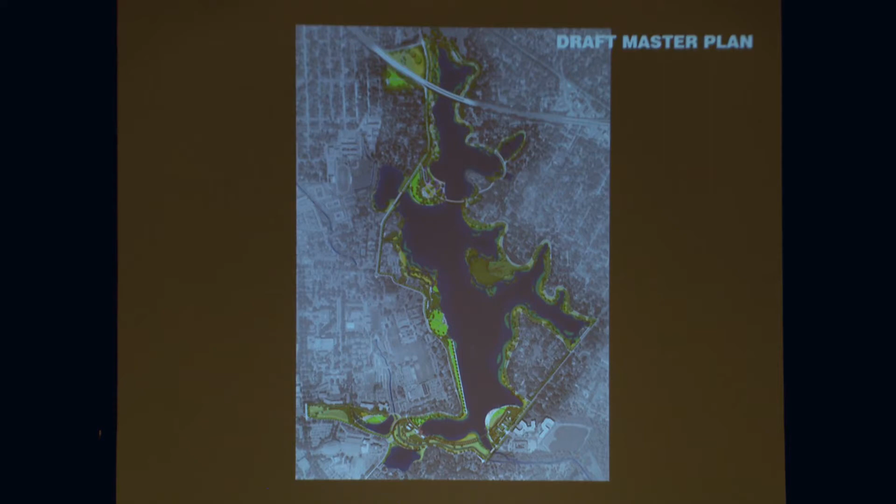We got a lot of pushback about some of the wetland shelves and islands we're creating, people saying, hey, you're getting rid of my lake. So we've taken all that under advisement and said, you know what, you're right, let's take some of that and move it off-site. We've talked with LSU about some issues with it. There's definitely transportation issues of moving it, but there are places we think we've identified that actually would like to have some of the fill. We don't want to put it all there, but some of it for sure.